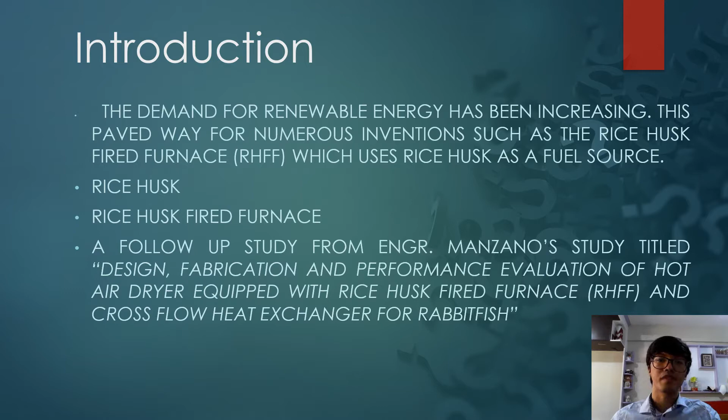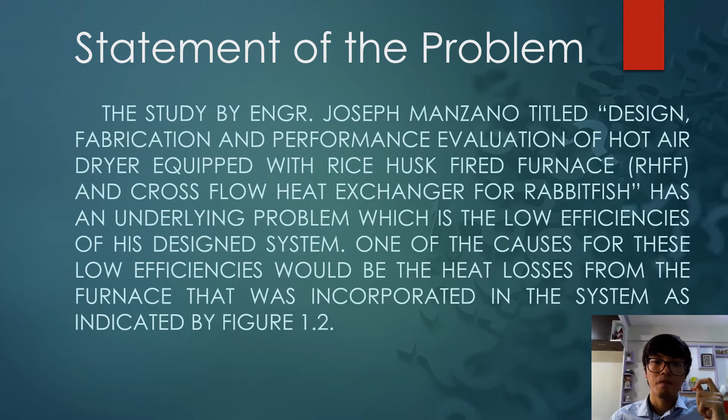Next is the statement of the problem. The study by Engineer Joseph Manzano has an underlying problem which is the low efficiency of his design system. One of the causes for these low efficiencies will be the heat losses from the furnace that was incorporated in the system, as indicated by figure 1.2.

We can see from this figure the heat losses from the furnace that was incorporated in the drying system. From the rear surface, 3004.81 watts of energy was lost, and from the right side and left side surface, 1968.569 watts of energy was lost.

This problem needs to be studied in order to lessen the energy losses of the rice husk fired furnace, which in turn improves the overall efficiency of the system.

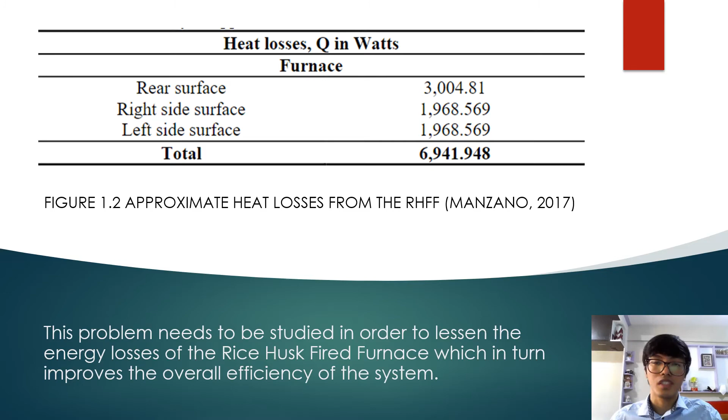Next is the objectives of the study. The main objective is to design, simulate, and evaluate the performance of an improved rice husk fired furnace to reduce the heat loss of the furnace from the original design.

Specifically, this study aims to: number 1, design and simulate an improved version of the rice husk fired furnace from the previous study using a simulation software called Autodesk Fusion 360; and number 2, simulate the design of the rice husk fired furnace of the previous study.

The importance of the second objective is so that we are able to conceptualize a design based on the results of the simulation. And number 3, to evaluate the performance of the improved version of the rice husk fired furnace and compare it with the simulated results of the previous study.

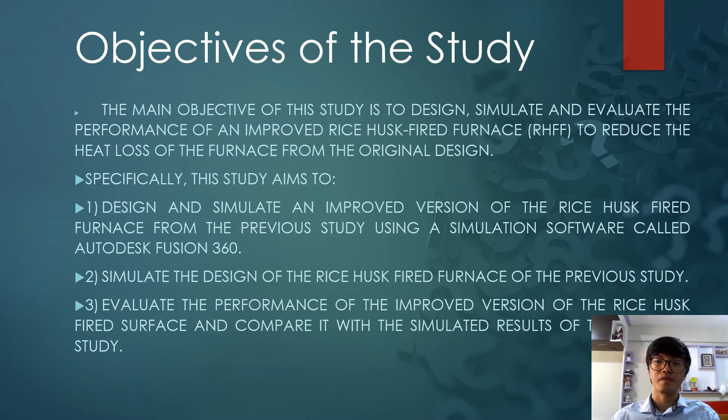Next, we have the significance of the study. The reason why our topic is very important is because improving the overall efficiency of the drying system lessens the fuel needed to achieve the same energy output.

This study also promotes the usage of the rice husk fired furnace along with the usage of rice husk as another fuel source for heat energy, so that rice husk will not be considered as waste anymore. In addition, the improved design of the furnace may also be used for applications other than drying food, such as the heat treatment of various materials.

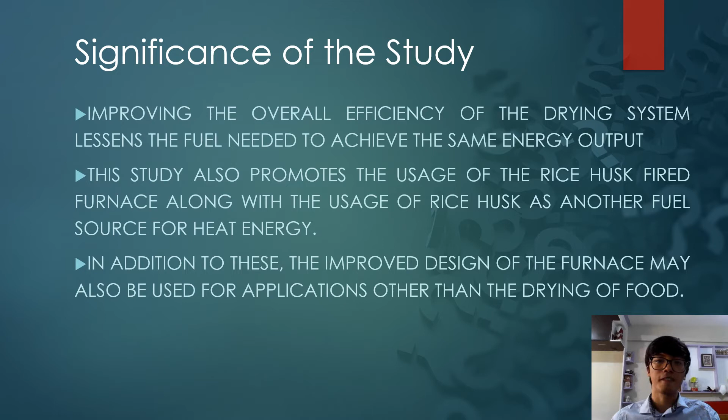Next, we have the scope and limitations. This study will only focus on improving the design aspect of the rice husk fired furnace through the use of a simulation software, namely Autodesk Fusion 360. The study only compares the simulated performance of the new and old furnace design. It will only focus on the improvement of the furnace design aspects such as the structure and materials.

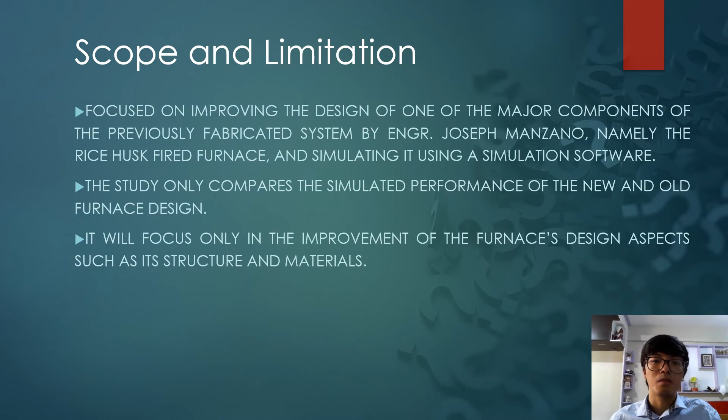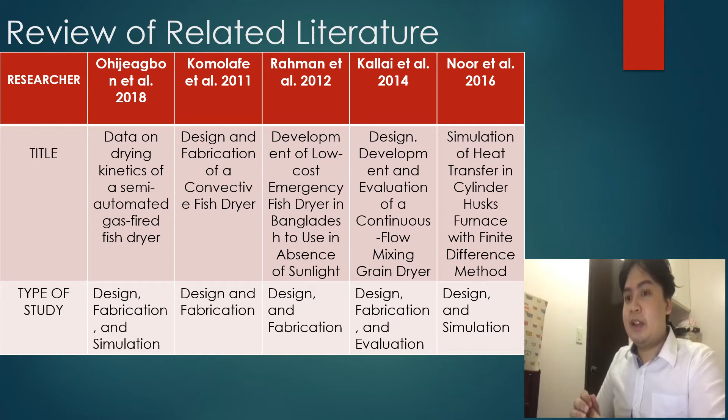In this table, it is divided into 3 rows: researchers, title, and their type of study. For Ohijeagbon and others, the type of study conducted was design, fabrication, and simulation. For Komolafe and others, the type of study was design and fabrication. For Rahman, it is the same as Komolafe and others, which is design and fabrication as well. For Kallai, the type of study conducted was design, fabrication, and evaluation. For Noor and others, the type of study conducted was design and simulation.

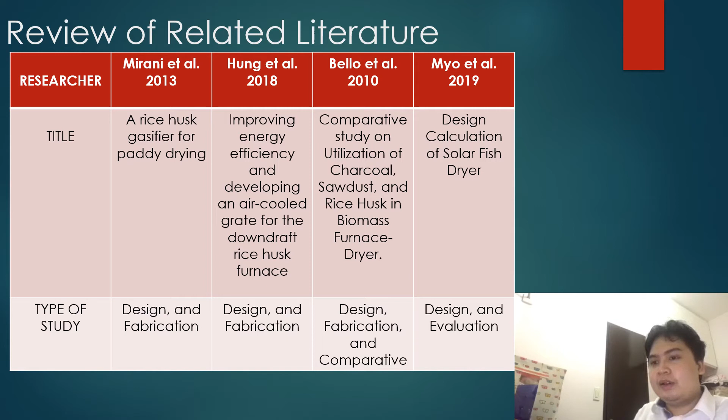Following Mirani and others, their type of study was design and fabrication. For Hung and others, their type of study is also design and fabrication. For Bello and others, their types of study were design, fabrication, and comparative. For Myo and others, their type of study was design and evaluation.

Lastly, one of the studies that we have is from Engineer Joseph Manzano's study, which is Design, Fabrication, and Performance Evaluation of Hot Air Dryer Equipped with Rice Husk Fired Furnace and Cross Flow Heat Exchanger for Rabbit Fish. The type of study that he conducted was design, fabrication, and performance evaluation. This is the main focus or the main basis of the said paper.

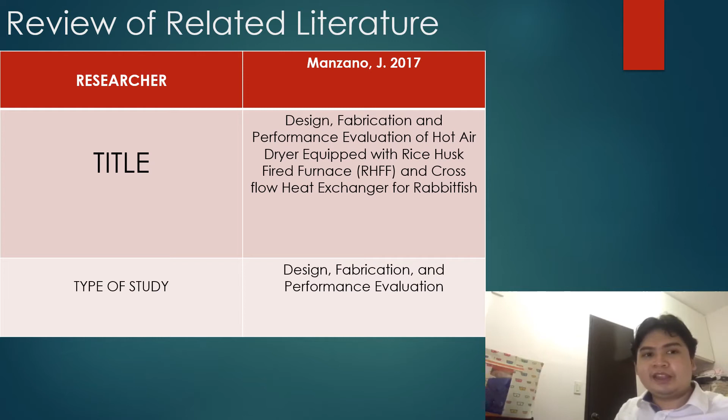Thank you. Now, let's proceed to the theoretical considerations. In this study, we define 5 different terms that might help in our simulation. The first 3 terms are the modes of heat transfer, which are conduction, convection, and radiation. We chose these terms because they are the 3 main factors that affect heat transfer, which is related to our topic of increasing the efficiency of the furnace.

The first mode of heat transfer is conduction, which is the process by which heat or electricity is directly transmitted through a substance when there is a difference of temperature. It is defined by the rate of heat conduction equals to negative of thermal conductivity times the temperature difference.

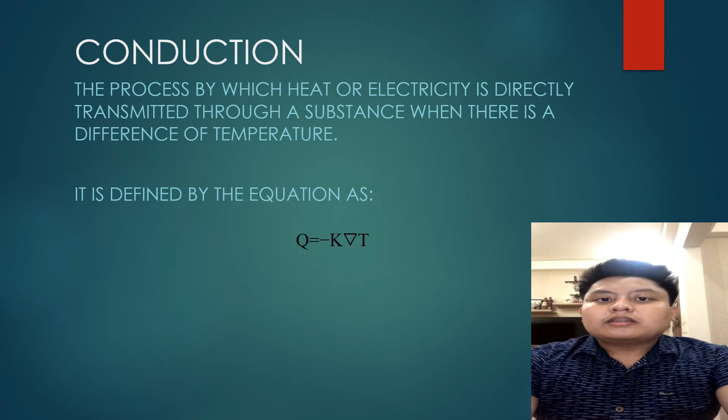The second mode of heat transfer is convection, which deals with the flow or movement of fluids to transfer the heat from one solid surface to another. It is defined by the equation as the rate of heat convection equals the product of heat transfer coefficient and heat transfer area multiplied by the difference of surface temperature and fluid temperature.

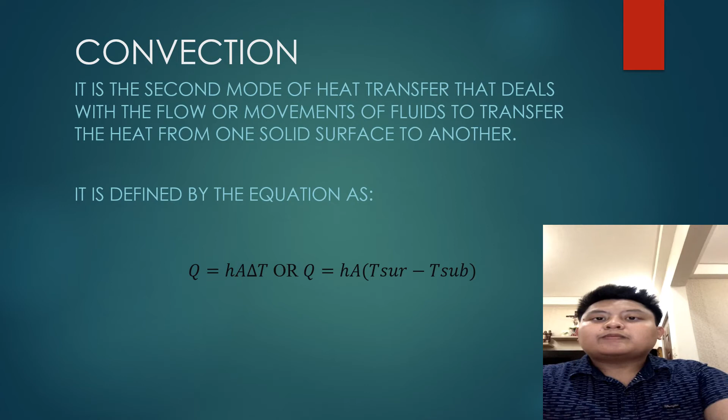The third mode of heat transfer is radiation, which is the transfer of heat through an electromagnetic wave. This mode of heat transfer does not depend on contact between the heat source and the heated material. It is defined by the equation as the rate of heat radiation equals the product of emissivity of the material surface, the Stefan-Boltzmann constant, the area of the surface, and the temperature of the surface.

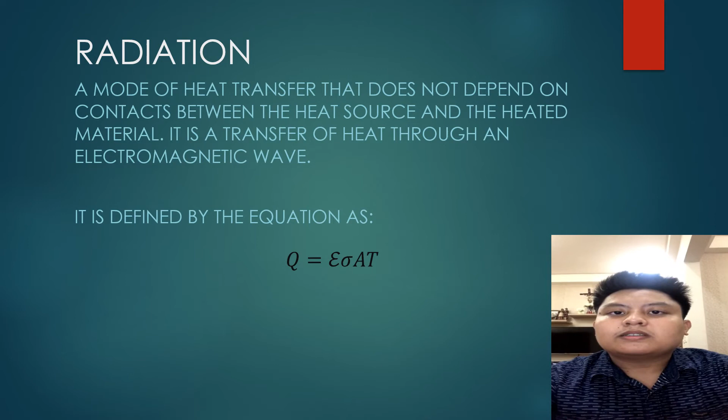Now let us proceed to chapter 4, which is the methodology. In this study, there will be 3 phases to complete the activities needed. The first phase will be the furnace design conceptualization, consisting of 4 steps. The first step is to adopt the required values and design from the previous study, such as the formulas and values used in Engineer Manzano's paper, including the calculation of heat loss, higher heating value of rice husk, and the mass of air required for combustion of the rice husk.

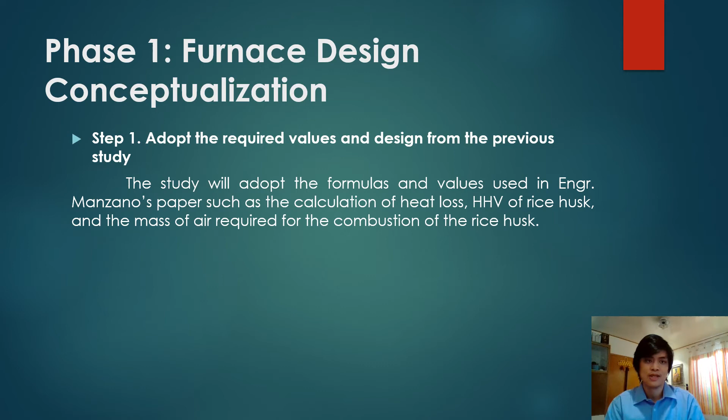The second step is the simulation of the previous design. In this step, the furnace designed by Engineer Manzano in his paper will be simulated for future comparison using Autodesk Fusion 360. The sketch of the furnace of Engineer Manzano is as shown.

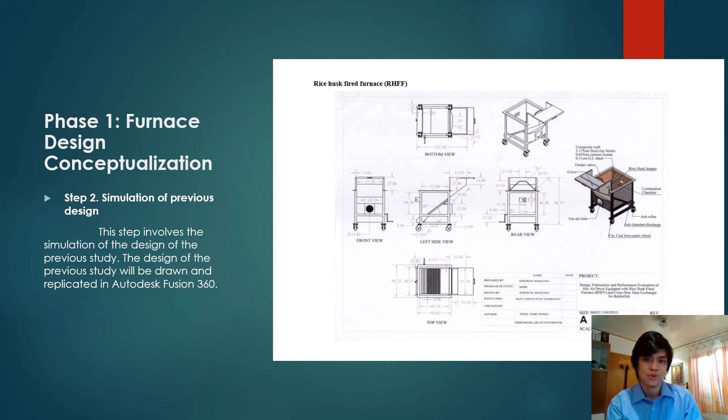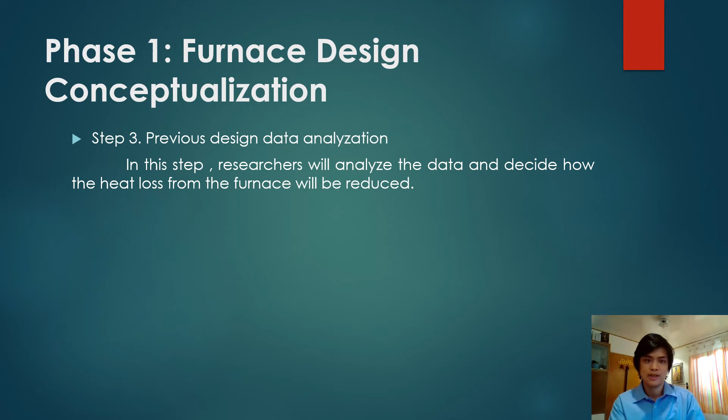The third step is the previous design data analyzation. In this step, the researchers will analyze the data and decide how the heat loss from the furnace will be reduced. The fourth step is the test design conceptualization.

The rice husk fired furnace test design will be conceptualized first by using the data obtained from the preceding furnace simulation and will be drawn in Autodesk Fusion 360.

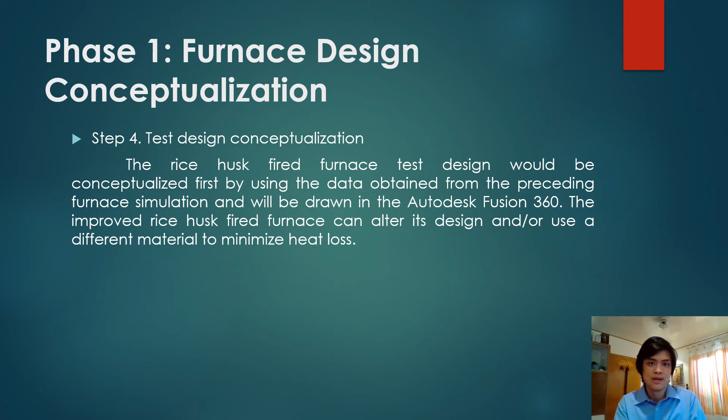Basically, in this step, the initial proposed design will be presented. In figure 4.2, the isometric view of the initial furnace design is shown. Here we can see the fan air inlet, the feeder, and the surface where combustion will occur.

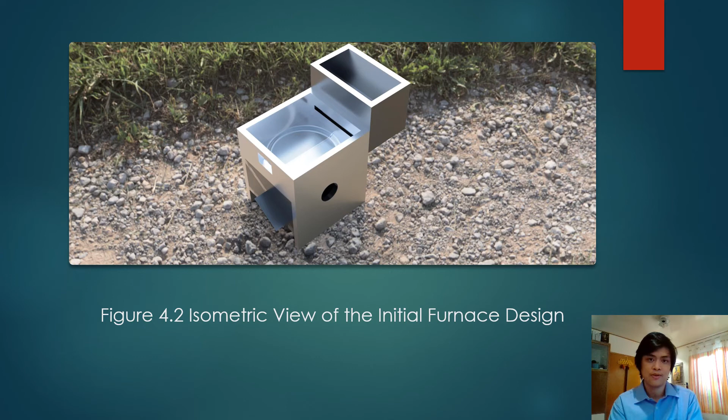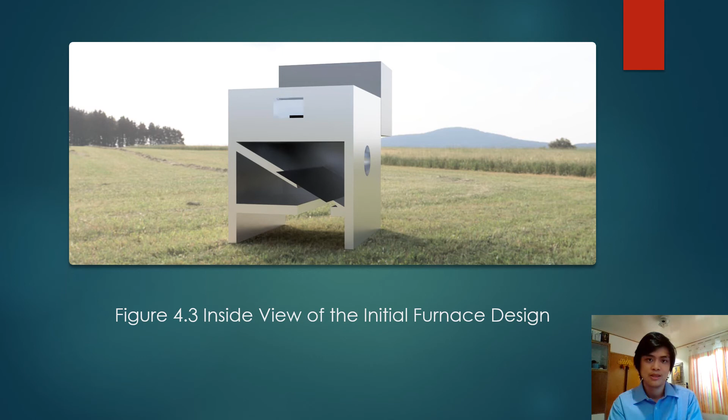In figure 4.3, we can see the inclination of the ash chamber covered by a metal sheet. It is covered so that there will be no loss of air entering the furnace.

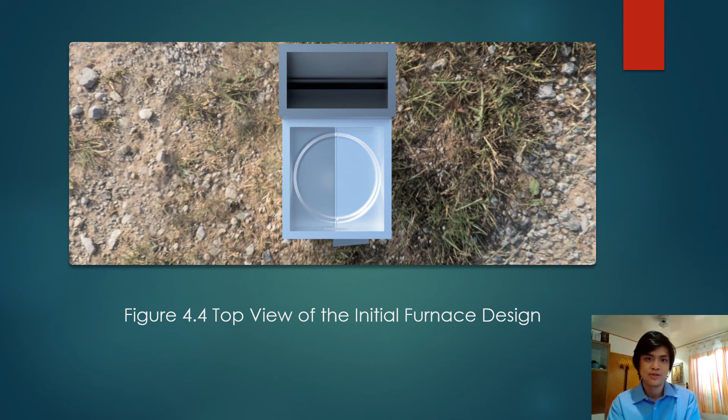In figure 4.4, the top view is shown, with the width of the feeder shown in this figure. Here in figure 4.5, the fan air inlet is shown, and in this design it has a 14 cm diameter.

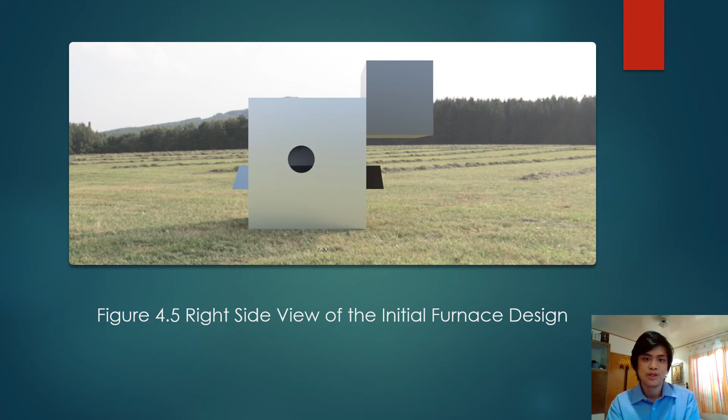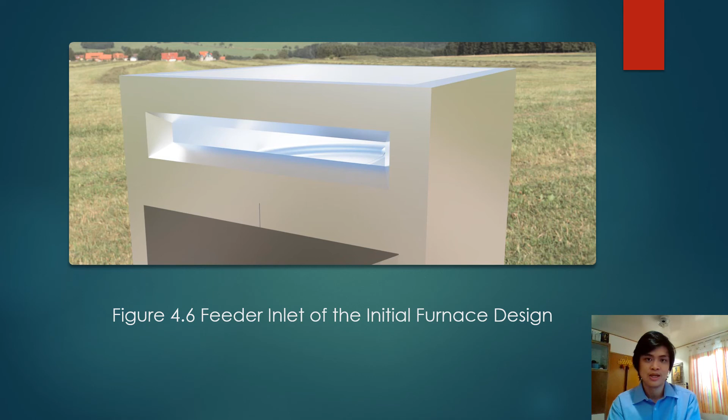In figure 4.6, the feeder inlet is shown. It is tapered with a 26.5-degree angle so that the rice husk entering will have a higher velocity.

In figure 4.7, we can see the grates on the left side of the platform, where the air from the fan air inlet will enter. The grates will have a width of 1 mm, because a rice husk's typical dimension is 4 mm by 6 mm, with the most common being 2 to 3 mm or below. Having a width of 1 mm will ensure that no rice husk escapes through the grates.

The right side of the platform will be supported by a hinge, making it function like a trapdoor. In this way, it will serve as the outlet for the ashes of the burnt rice husk.

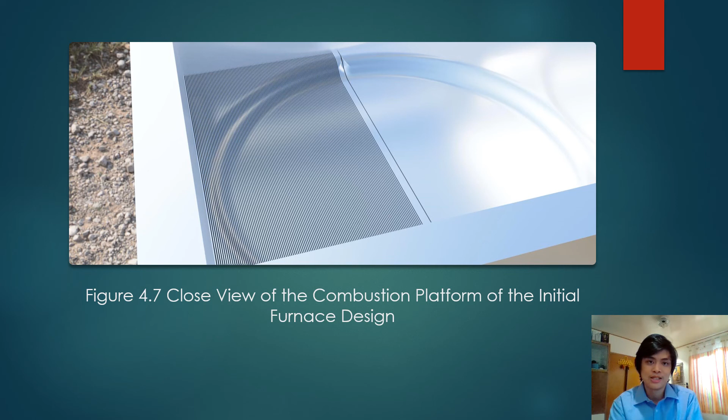Now let us proceed to phase 2. This phase will only contain 2 steps. Here in step 5, the researchers will consider the flaws of the conceptualized design after running the simulation. It will then be improved and simulated again to find the significant difference.

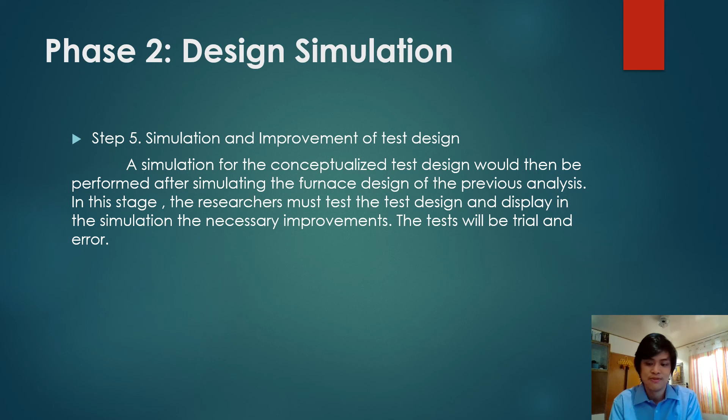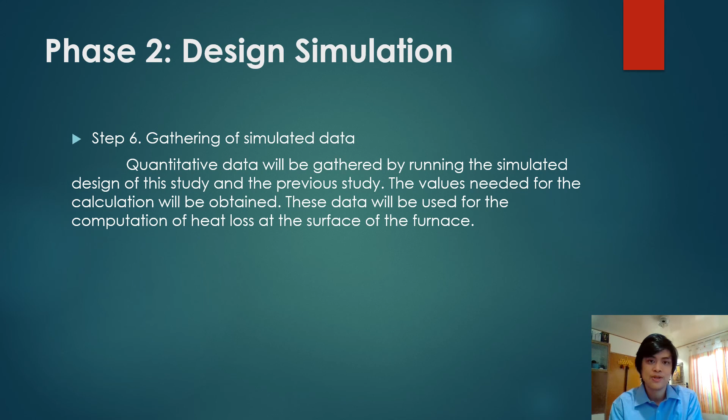In this step, the values gathered from the simulation of the previous study and the simulated design in step 5 will be gathered to supply data needed for phase 3. This is where the determination of the heat losses of the simulated designs will occur.

In phase 3, there will be 3 steps for the researchers to evaluate the results. First is the data comparison of the previous and improved design. In this step, the data gathered from the previous and enhanced design will be compared. It will be the basis for investigating whether there is an improvement in the efficiency of the furnace.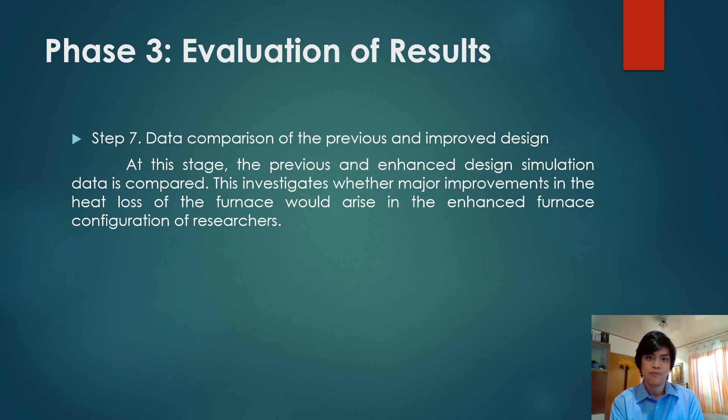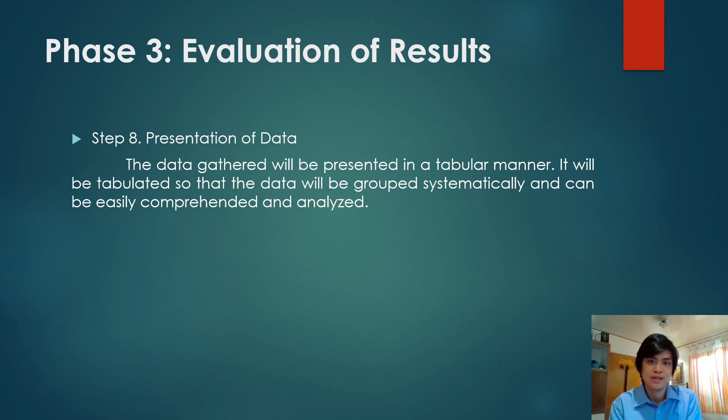The 8th step will be presentation of data. Here, a table will be used for the presentation of data so it can be easily understood by the reader and the researchers. The last step will be the analysis of data and interpretation.

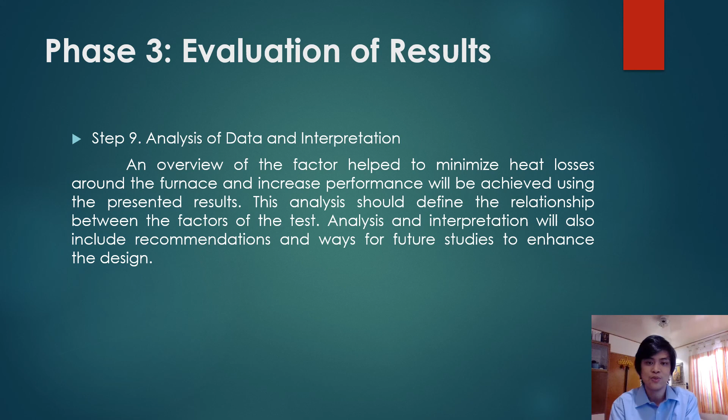An overview of the factors that helped minimize heat losses around the furnace and increase performance will be achieved using these presented results. This analysis should define the relationship between the factors of the test. Analysis and interpretation will also include recommendations and ways for future studies to enhance the design.

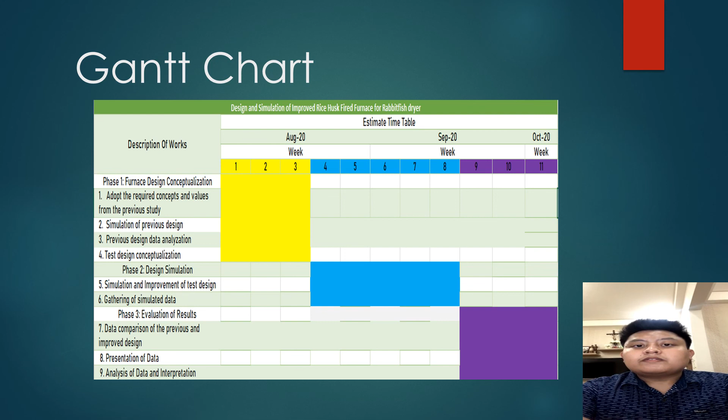For a better representation of our proposed schedule, the researchers utilized a Gantt chart, which will be the basis for the schedule of steps to finish the study. For Phase 1, the furnace design conceptualization, it will be conducted from week 1 to week 3. For Phase 2, the design simulation, it will be conducted from week 4 to week 8. And for Phase 3, the evaluation of results, it will be conducted from week 9 to week 11.